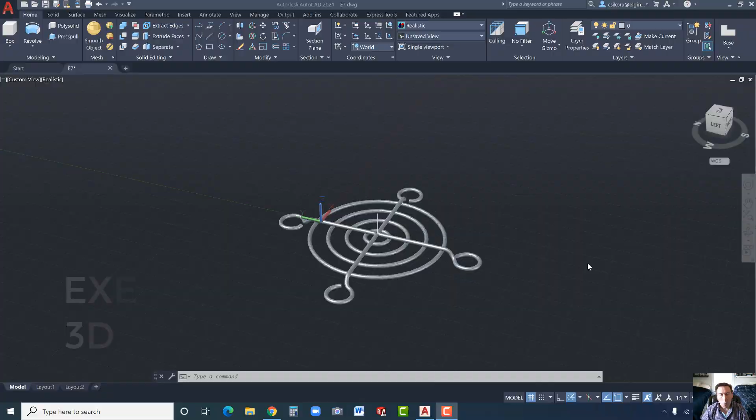This is a bit of an advanced lesson that we're looking at here. We're going to create this—this is actually one of those little grills that would go over a fan on the back of a computer. They don't use them as often on computers like they used to. Now you see them on medical equipment and things like that, but it's pretty generic.

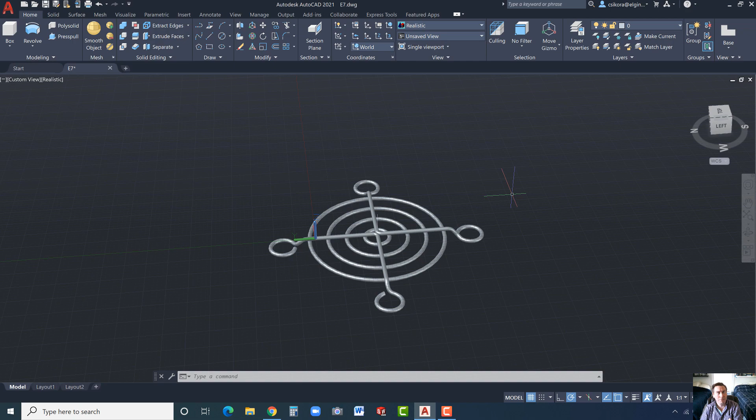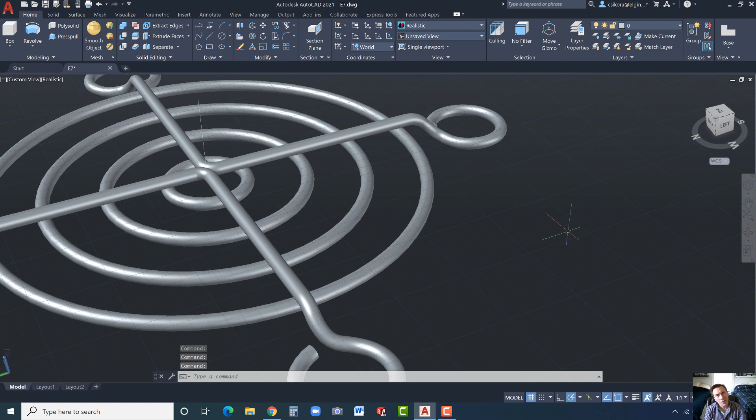So we're going to step through now. You might say, well, what's really advanced about this? For the most part, not much of it is. But if you look closely at the actual little foot pads, or I should say where the screws are going to hold it down or fasten it down, that's a three-dimensional bend that we're looking at. We want to see how that's done—that's the gist of it. But then I'm going to show you some other techniques that might be useful for you in efficient modeling.

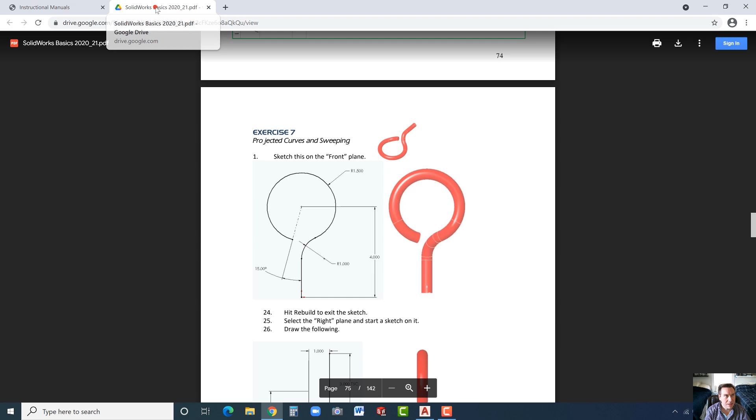So let's begin. First of all, the training guide I don't have written just yet—hopefully I should. If you want to go to vertanux1.com, and then go to the instructional manuals, you'll find this lesson in the Creo or the SolidWorks section. You won't find it in the Inventor yet, but you could look at either one of those. I should have an AutoCAD one up here someday, hopefully—no promises on that.

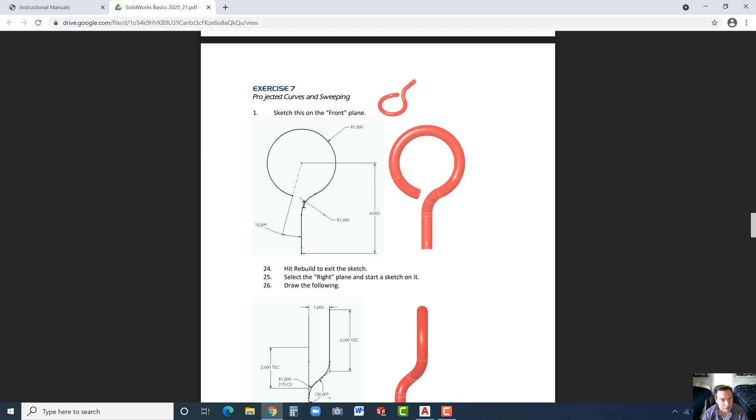But inside that, around page 75 or so, you'll actually see what we're trying to design here. You can see this is the bend part. We're going to draw this front view first, so it's about 4 inches in height, actually 5.5 if you account for the radius. We'll see how that's all put together, and there's a little opening there. Then we'll see the right side view, and we'll go ahead and construct that as well.

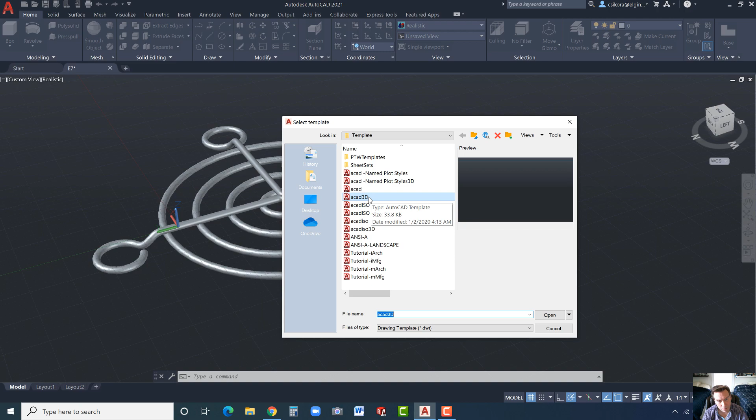So let's begin. Go to New, and we're going to use the AutoCAD 3D template. Those of you in other countries, or even in the US, you might want to use ISO, which is metric. My lessons are typically not metric—there's only a couple that are—but this one is not. So just so you know, you would go to the ISO 3D template for a metric version. But we're going to use the AutoCAD 3D, which is the Imperial version. Let's go ahead and click on that.

I like to start off, as always, with 2D wireframe. Then I go to Home and click on Top. Now we're going to start off by drawing a line. Go to the Line tool and turn your snap mode on so you can snap to the center there. Click, drag this up, type in 4, and hit Enter. Make sure it's vertical, then hit Escape. Let's click on Top here for a fit, and maybe scroll back a little so you can see the line.

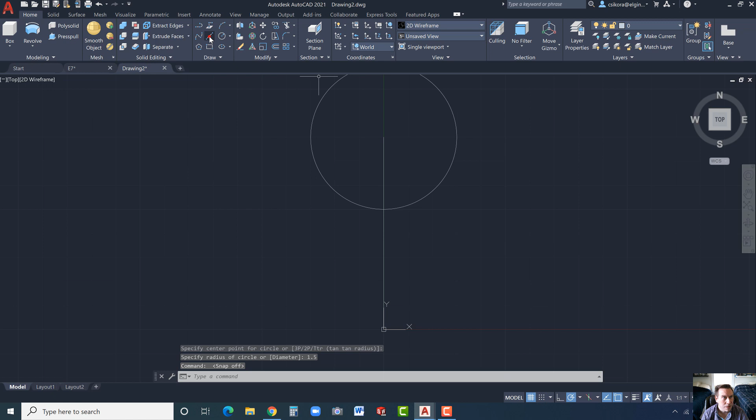Now, the next thing we're going to do, we know the radius is 1.5. So let's go center radius, snap to that top point, click and drag out, type 1.5, and hit Enter. At this point, I think we could turn off the snap to grid. Let's proceed to go to the line tool, and off of this point, click and drag down and cross over. We're going to make this about 2 inches, then hit Tab, and it's going to be 15 degrees. Then hit Escape.

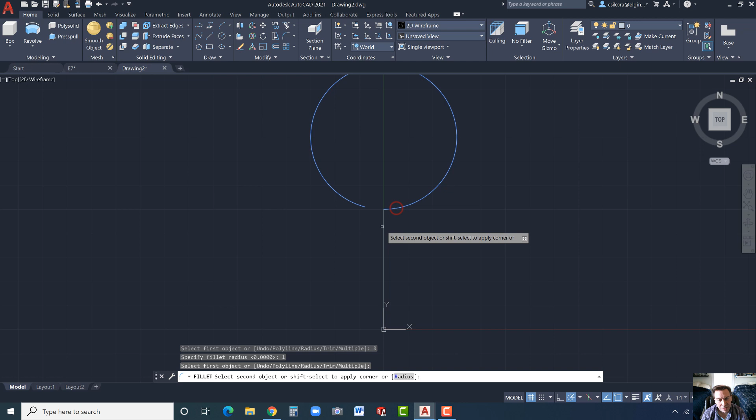Now we're going to trim that up—go ahead and trim through there. We could even trim this, and we could trim that, I suppose, or delete it, whatever you prefer. Now let's go to the Fillet tool, go to Radius, set it to 1 inch, hit Enter, and select this entity and this entity to get that radius in there. Now let's join it together, since we're going to go ahead and extrude this soon. So go to Join, click and drag a fence to surround it, hit Enter, and now it's one complete entity.

Now for the next one, let's go back to the Home button, and we want to make the right side view, which is a little bend in there. To do this, we're going to click on right over here—this is the rotate, and we want to rotate around the y-axis. Select that. Now rotate by moving your pointer to the right so that the z is to the right side, then click, and you'll see the grid will appear to the right.

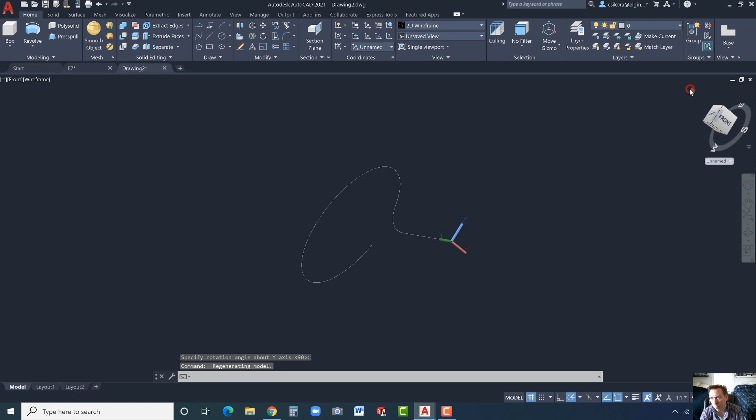There are other tricks, and I'm aware of that—I'm just showing you a way that other people who used Inventor or other CAD systems out there that are plane-based can understand. We're basically rotating our sketch plane in this case. Now let's go to the front. Actually, go back home, and rotate this around.

Okay, actually, I guess we could go to bottom. There we go, that's fine.

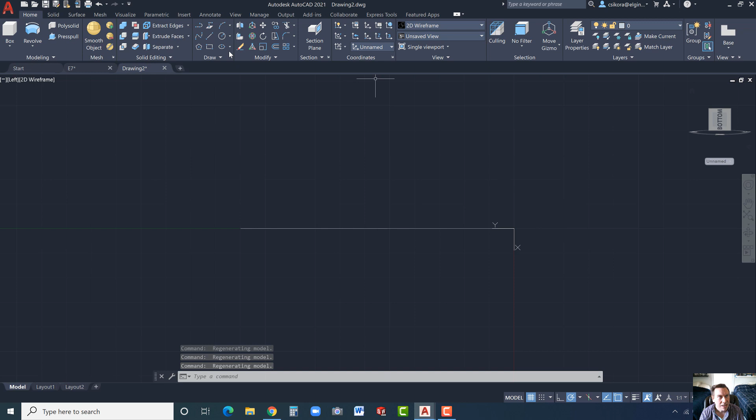Now we're going to go ahead and draw some more geometry. Click on the line tool and snap to this point, drag it to the left, and it should be 1.5, so we're following that edge that we see. Now drag this down, and we want this to be 1 inch.

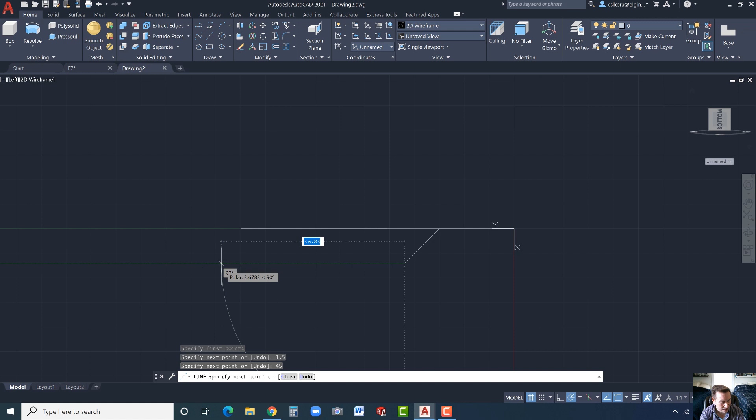Hit tab, and then we want this to be 45 degrees. Now drag this to the left, and we could have this extend beyond, so we could even put 4 inches in there if we want, and then hit escape, because that's not going to matter so much.

Now we could go to the fillet tool and go to radius, and we should be set for the 1 inch. You can just hit enter, and I'll select this and that, and then select this and that. Oops, hit escape, hit enter again, and then go back to radius. Oh, it was already set to that, that's fine. Enter, select this and that. There we go, so now we have the fillets on there.

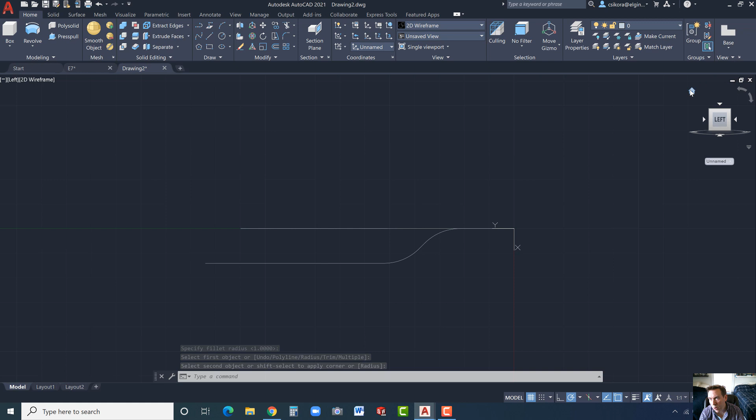If we go back home, we can now see, there it is, and we're going to go ahead and join those geometries as well. Click on modify, go to join, select this little segment right here at the fillet. There's a little tiny segment in there, this one here, and this one right here, and hit enter.

And I'm aware that my dimensions are a little bit different than the training guide. Feel free to use mine or the ones that are in the training guide, there's just some slight variations to them. But in this case, I wrote the guide, so I'm not overly concerned. I'm just going with what's fast versus having to toggle to and from the manual.

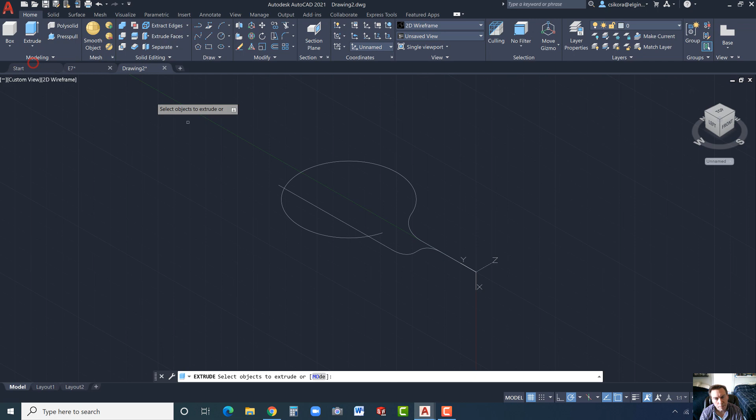Okay, and now we're going to go ahead and extrude these. So let's go to extrude, and we want to extrude this one here. Hit enter, and let's just extrude it about 3 inches in the downward direction. We didn't need it that deep.

But now let's go back, hit enter to extrude, select this one, hit enter, and drag this off. We're going to go 4 and hit enter.

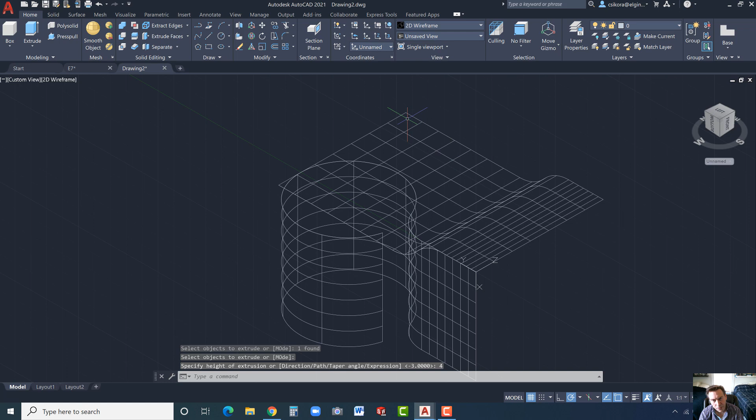Now let's shade this because it's going to be a little easier, I think, for you to see what we're doing. I'll go with shades of gray.

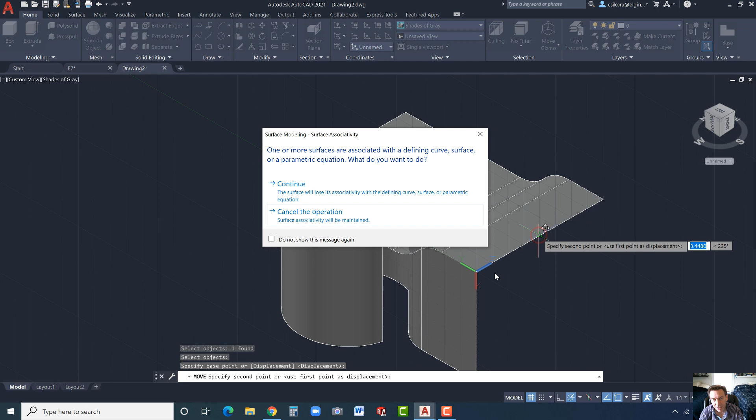Now what we need to do is get this sheet centered more. So let's go to move, click on move, find the midpoint. Actually click on the geometry first and then hit enter. Find the midpoint here, should give you a triangle, click, and it's okay. It says it's essentially going to blow away the curve connection. That's fine, we don't really need it anyhow in this one.

Now move this over to where the origin is. Click, and essentially that just centered it. Now you can go ahead and hit escape to make sure you don't have anything selected.

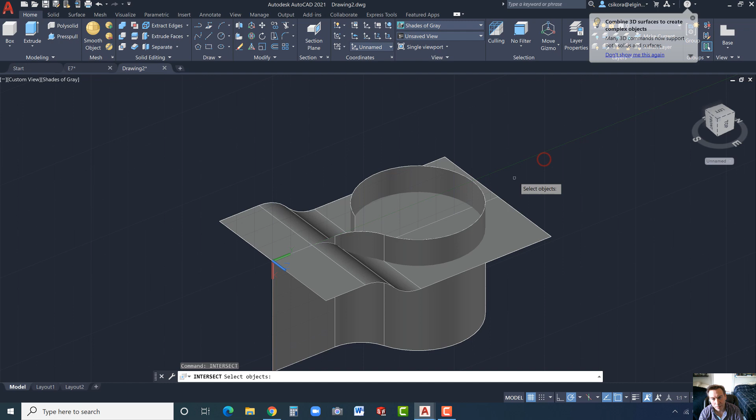At this point, we're going to go ahead and do an intersection. So type in INT, and you'll see intersect. Click on it, select this body, and then this one, and hit enter. And now we have a 3D curve.

Let's dissect this a bit. Let's create a new layer here. Go to new, and we're going to make a curves layer. Okay, hit enter, and you could close that.

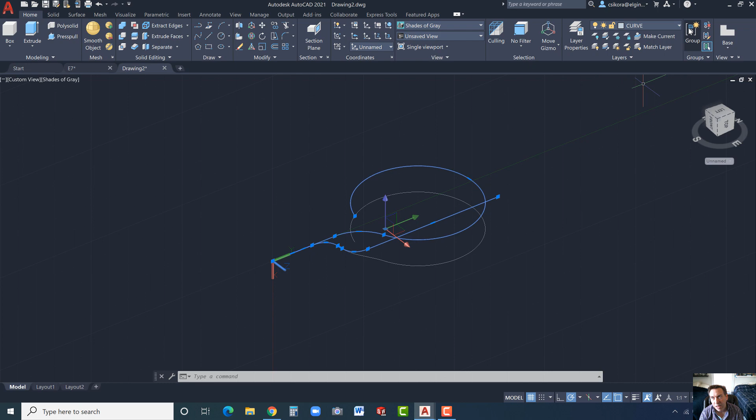Now let's select this straight one right here, and then this top one here. Go to the layers and just select curve. And now you could go to that same one and turn on the light, or turn off the light bulb, and it should hide those. And what it's left behind is our 3D guide curve that we've just created.

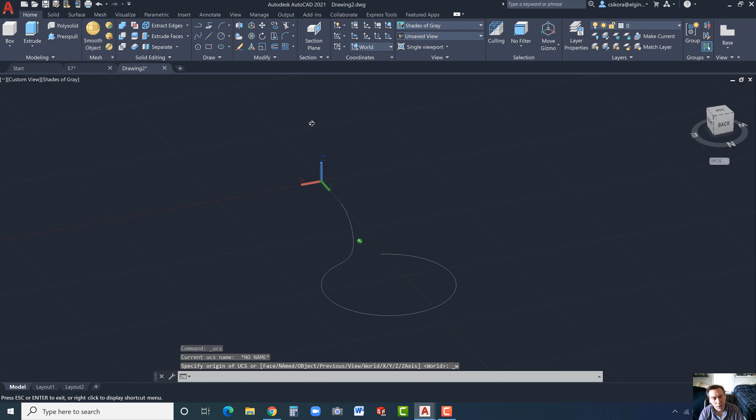Let's go ahead and go back to UCS World, it resets everything for us. I had to hit it twice, I'm not sure why, but that's all right. Okay, and as we rotate, we can now see we have a nice guide curve that we could follow through with.

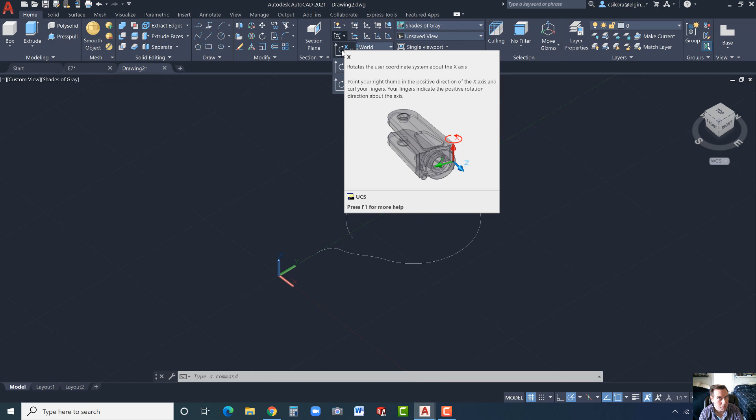Now what we're going to do, and again, we don't need to always do this. There's other ways, and if you have a way and you want to share it down below in the comments, go ahead, I know that there's probably a dozen ways to do this. I'm just doing this for the benefit of those coming from Inventor or some other CAD system that's plane-based.

We want to rotate about the X, and then make sure that the Y goes vertical. So see 90, I just dragged that up and it snaps. Click. And then now we could go to the circle tool and make sure we go with center diameter and snap to that point. This rotated us 90 degrees and we want it to be 0.5, and hit enter.

Now we could go to underneath extrude, find sweep.

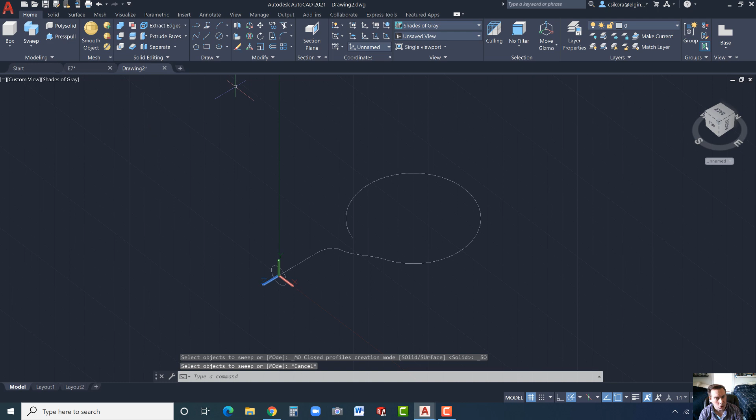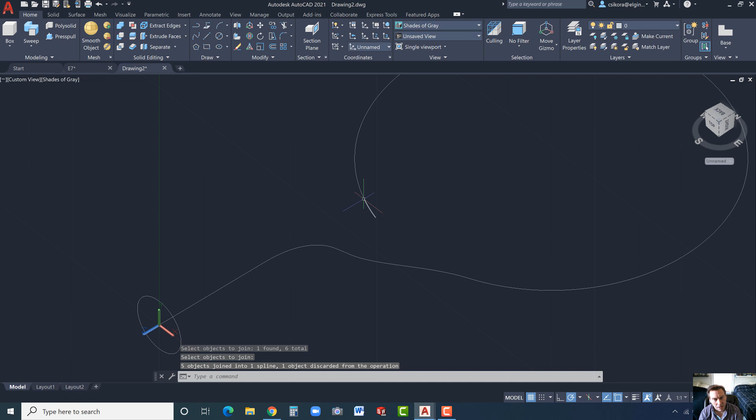Hit escape before we do that. We need to join this curve first. So under Modify, go to Join and select them on an individual basis so you don't accidentally select wrong ones. There's a few fragments here too. It might not have been a bad idea to just select the whole group. We just want to make sure. Yeah, see, I missed that one. Let's go back to Join, hit enter, click on this.

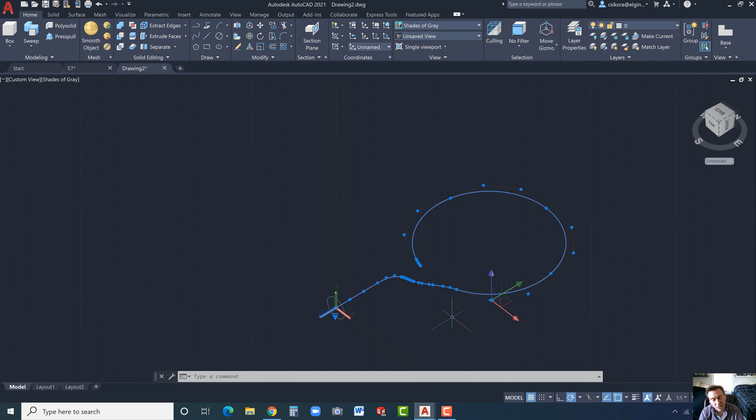There's little segments, so what we want to do is click and drag a fence to surround all of these, hit enter, then hit escape. That way we know it's all one piece. Now look at that, when we click on it we have control vertices to drag and adjust if we want, but don't do that here. You can take it after the lesson and send it to me, but let's finish this first.

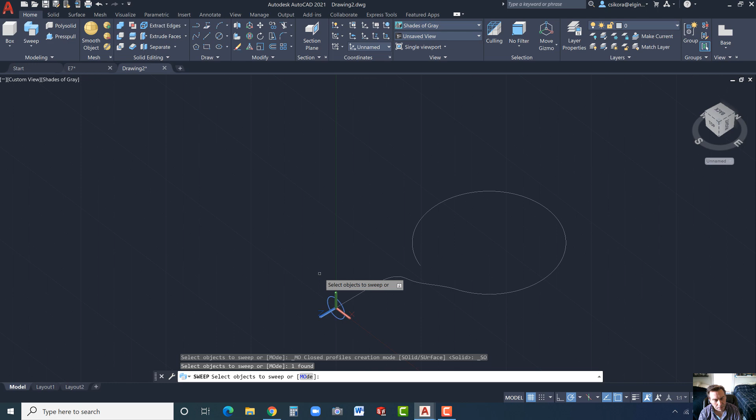Now we're going to go ahead and do our sweep. Click on Sweep. The first thing you select is the profile, which is the circle we drew. Hit enter, now select the path. We should see a preview—actually it's more than a preview, it's done. And there is our geometry.

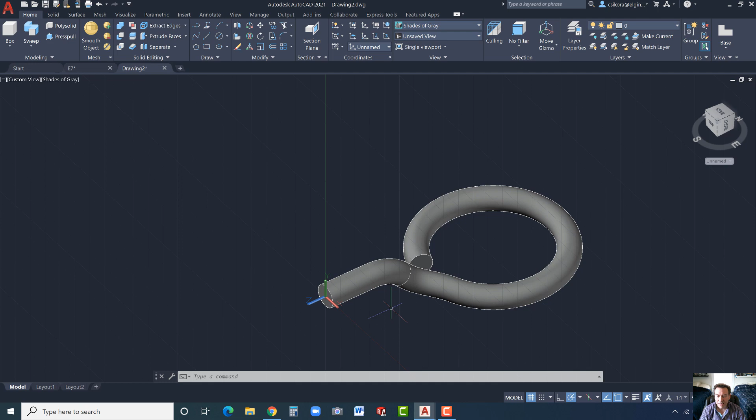Before you go on saying, well, what good is this—imagine you could use this for an exhaust system on a car that has to weave around wiring that goes around other entities in 3D. There are other tools in here, and manipulator handles that can maybe make it easier, but this is just one technique.

Now we're going to go ahead and do the rest of this body. Let's go over here to Press Pull and extend this out. Could I have done this earlier? Absolutely, all in one. But let's make this 7 inches.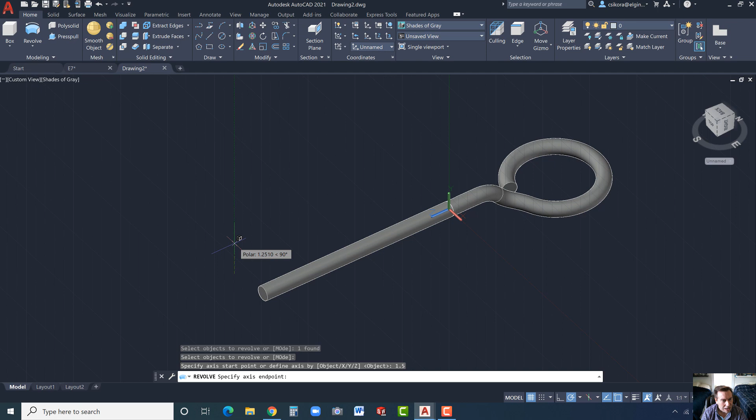Now we're going to go ahead and use Revolve. On the filter, go with edges and select this edge right here, hit enter. Now it's asking how far out we want this—let's make this 1.5 to the left, notice I'm snapping. Enter, and then just drag it straight up. This is basically our axis of revolution. It's going to give us the radius we saw earlier. Just make sure it's at 90 degrees there. The height doesn't matter. Click.

Now it's going the wrong direction, so hit reverse. We only want this to go 45 degrees, so type in 45. You're probably wondering why 45 degrees—we're going to double this up by mirroring it, and 45 and 45 gives you 90 degrees, so it's going to make this a 90-degree elbow for us. That's the thought process, at least.

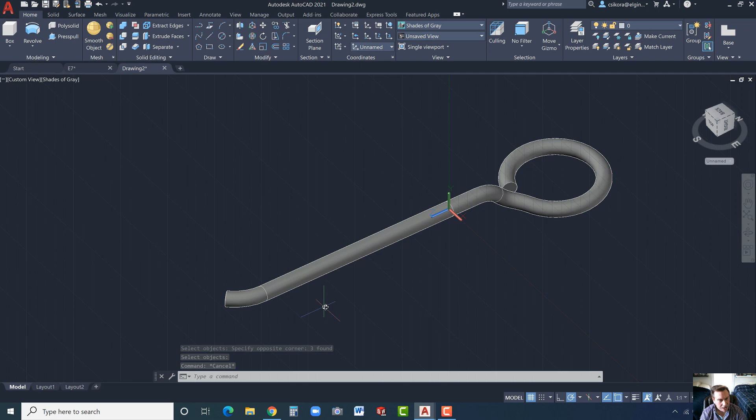Okay, let's merge all these, or unite them. Go to Solid Union, and we could probably just select all of them. Hit enter and escape, and click on it to make sure it all highlights. We look good. Rotate this around so you can see that end there.

Now again we're going to go to Mirror—we haven't used mirror yet in this case. Let's select the entity we want to mirror, hit enter, okay? And I like to use 3 points, especially on this, since this is kind of a weird little entity here. So pick up on the quadrants: 1, 2, 3. And delete source—no.

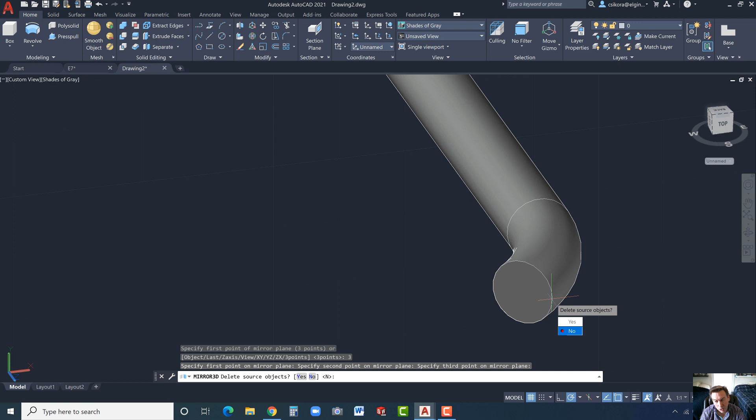There we go, so we've just moved this over to the other side—there's our 90-degree elbow. Let's unite them. Again, you could just click and drag across. If you go from right to left, it selects everything in the bounding box. If you go from left to right, everything has to be enveloped to be selected, so anything sticking out is not going to be part of the selection. That's why I went from right to left when making the bounding box. Now we have our elbow here.

Let's now flip this around, and we could rotate this around the Y-axis. You're going to see we're going to put some little circles for our revolve. Let's go over here, we want to go around the Y. Or sometimes I just like to reset so we don't get confused—go back to this little world there, make sure the Z is pointing up. Now we could go over here and rotate around the Y, and the Z should point to the right and make it snap. See, 90 degrees, click.

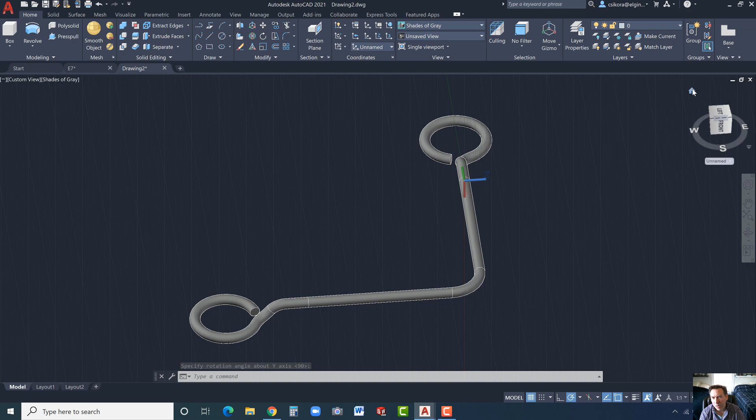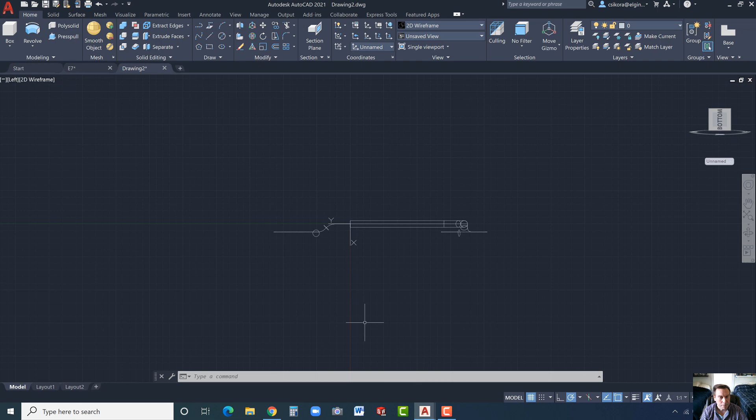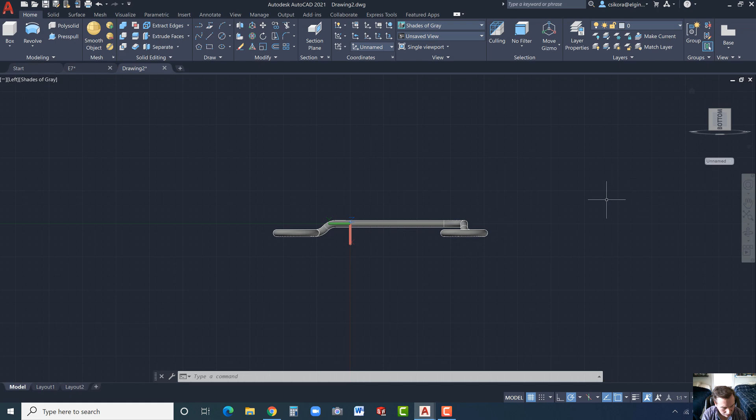Now let's go home and we could go to bottom. This is where I prefer to use wireframe again, which also shuts off the perspective. Note, you could always shut off perspective by typing 'perspective' here—0 is off, 1 is on. Perspective gives a vanishing point, just like in the real world the room gets smaller the further you are away. By disabling that, everything is straight no matter how deep you're looking. Actually, I think I'm going to switch to shades of gray. Let's see here—yeah, I think we should be able to do this. Let's flip this around.

I think we want it to look like that - that looks good. Basically we just want the top there. You could drag it around or go back home and reset it, and keep flipping these arrows until you get where you want, until you can see the top, then click on the top. If you want to rotate it 90 degrees, like standing upright, that's fine, or if you want to lay it down, that's fine too.

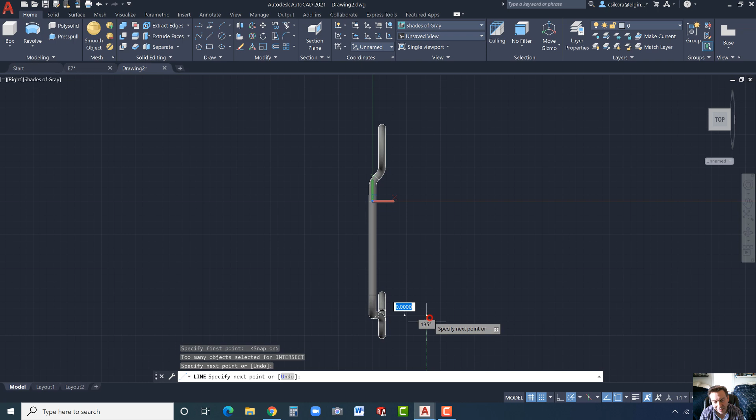Now we need to find the center of the model - that's not very hard. And that's the center of the model to be, not this one specifically. So go to line, and we want to snap - turn on the snaps here - and snap right in that center there. Click and drag it to the right or left, it doesn't matter, and the length doesn't really matter as long as you can see it. That's going to be our axis of revolution for the rings we're going to create.

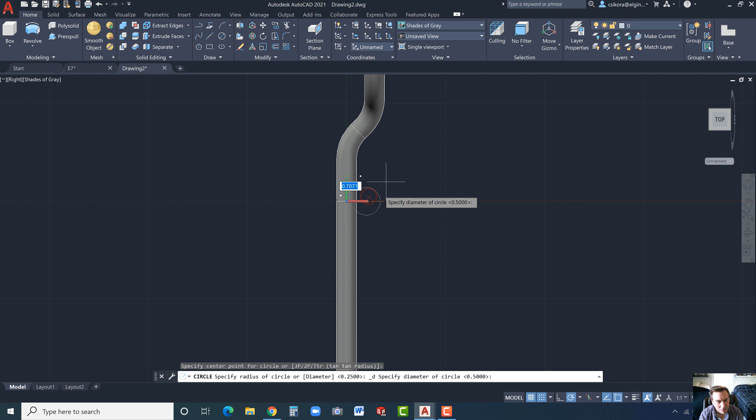Now we're going to go ahead and draw some circles. I'm going to draw the first one up here. That's pretty good right there, and we'll make it 0.5. Okay, it's snapped right there - you can see I'm still on snap to grid. You could turn off snap to grid now.

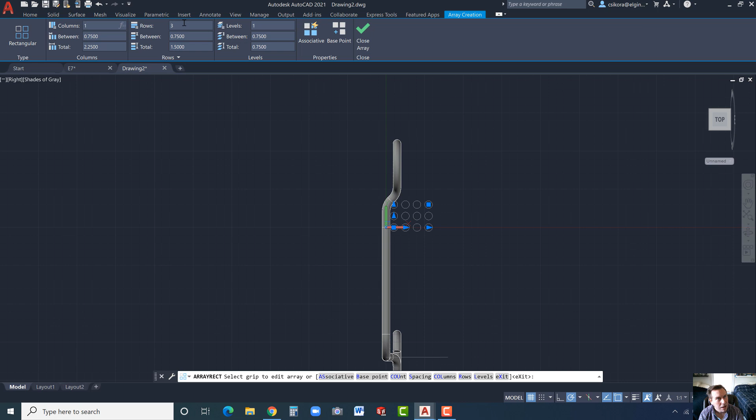With that, we're going to click on that geometry and go to rectangular array. With the rectangular array, you can see here 4 columns, which we actually just want 1. Then over here, rows, we actually want 4. And then for the spacing between, let's go with -2.

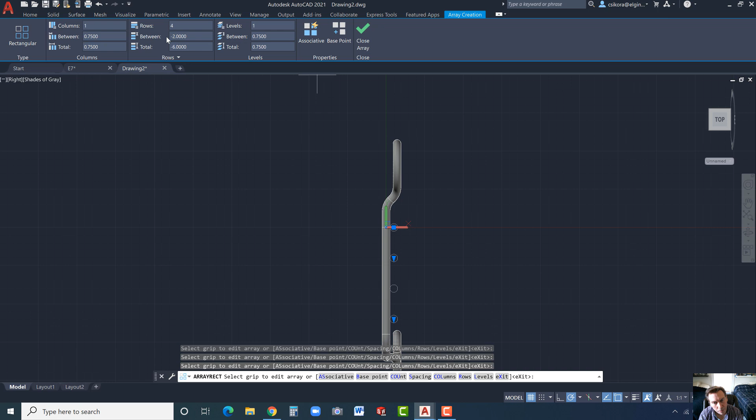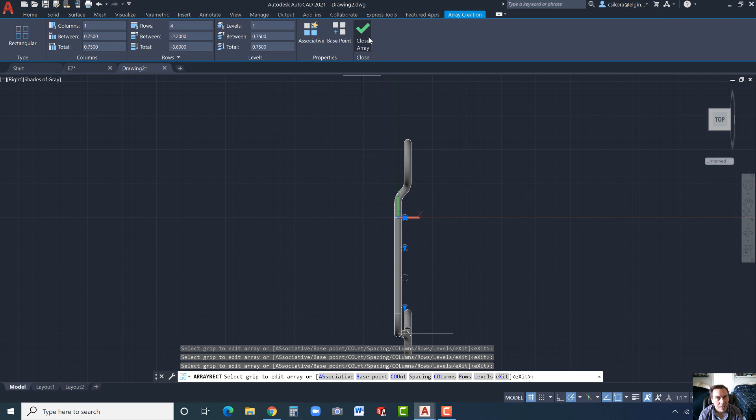All right, we should see them right there. We could actually make that 2.2, or something else, to spread them out a bit more - oh, forgot, let me type in negative again. -2.2. All right, looks pretty good. Hit close array, and now we're ready to revolve.

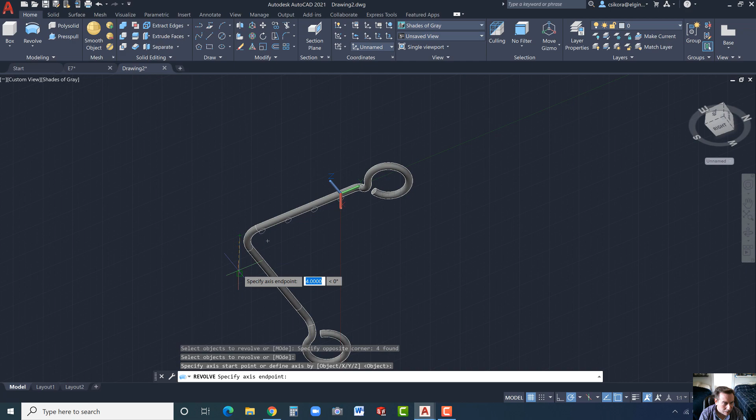So let's rotate this a bit, and we could go to revolve. From left to right, make sure you envelop those 4 circles, or you could select them individually. Hit enter, and this is going to be what we pattern around - not pattern, but revolve.

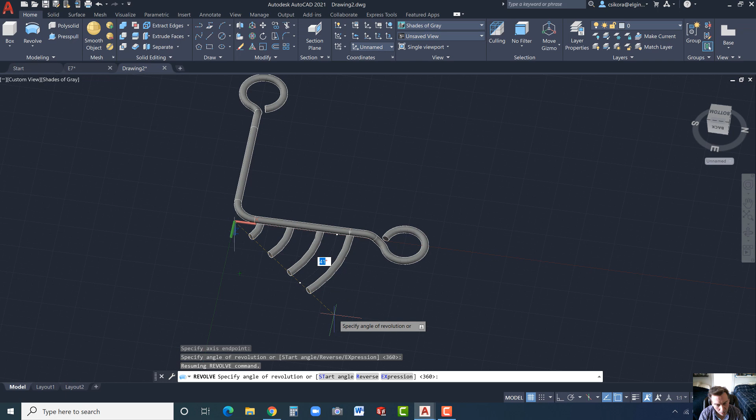Okay, now here's the thing - we're going to have this go, and I guess we could do the 45 first. Let's do the 135. Oh, and we're going to reverse it. 135, okay.

All right, now we're going to do those same ones again and add 45 to it. So for the filter, if you just turn on edge temporarily - remember, sometimes you have to turn off. This has like a little AI in it, I think, that turns it off automatically sometimes, which is really nice. So anyhow, we're going to select these.

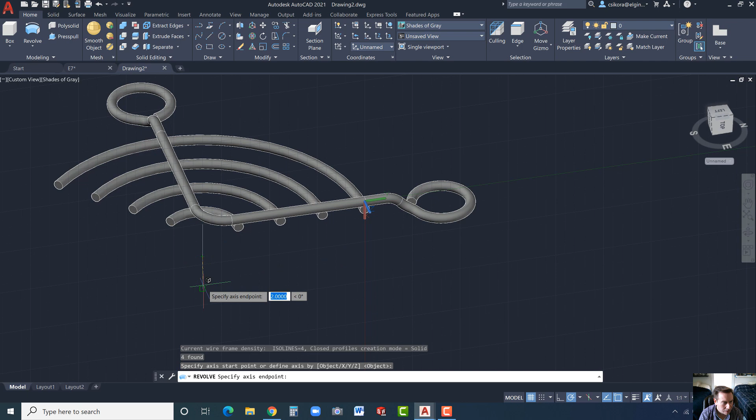Hit enter, and let's go ahead and select that point, this one, and this is just going to go 45. So 135 and 45 equals 180 degrees.

Let's merge everything, so go to Union, and I'm just going to go from left to right, or right to left. Hit enter - you can see everything is connected now, it's all one.

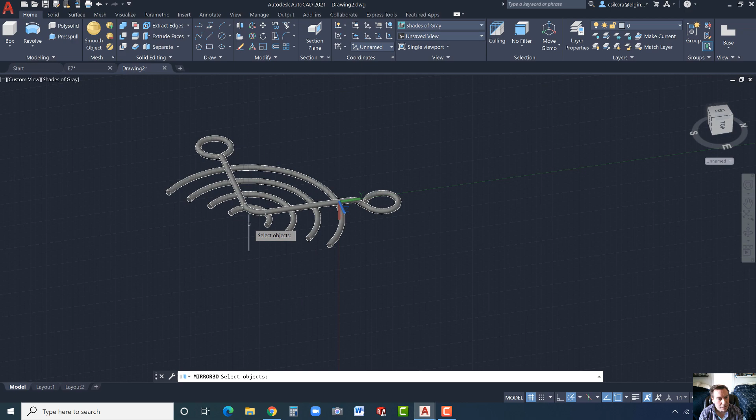And now we could go to Mirror. For Mirror, we just select the entity, hit enter, and now we could use some points here. We could select that point there, this quadrant here, and that. Hit no - all right, and so basically we made a mirror plane.

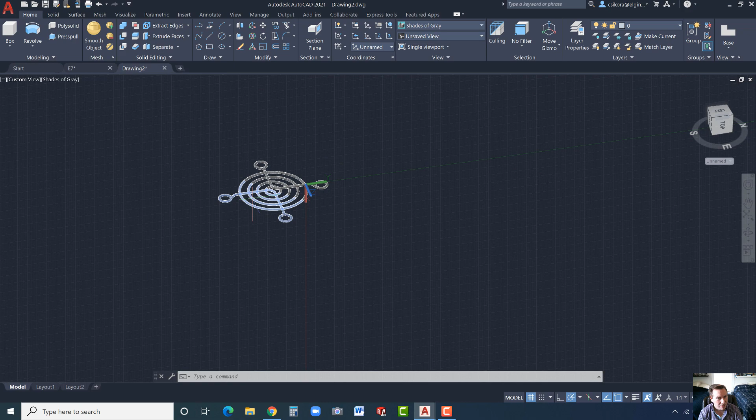And there it is. Now you might notice this one's a little different than the last one I made - let's merge it. In terms of, I made more of an opening gap there - that's more realistic. I had actually originally made the inside radius 1 inch, and I just upped it to 1.5 inches, so that's when we did that revolve in there.

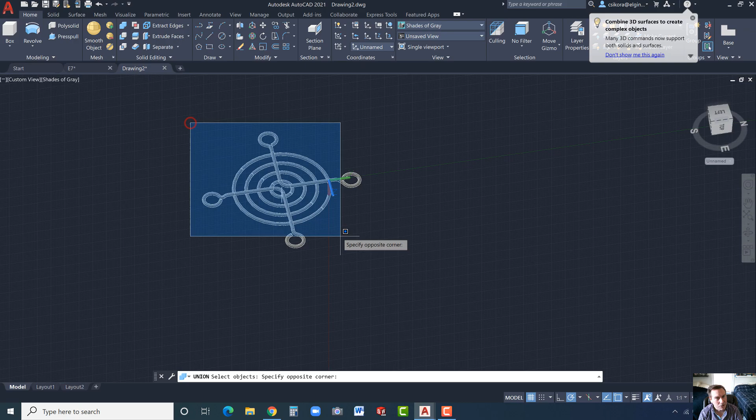Okay, let's unite all this - click and drag a fence to surround it, hit enter. And you can now go make it look a little bit better, under realistic. And there you have it.

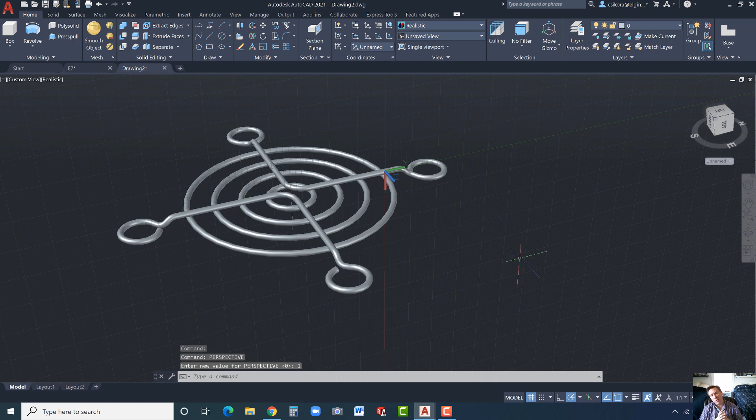That's a pretty advanced lesson. Just to show you here too, if you type in perspective, there it is - and see it's set to 0 right now. Turn it to 1 and watch what happens - it gives that vanishing point, looks a little bit more realistic, looks nicer for renderings, things like that.

Okay, that concludes this exercise. I hope you enjoyed it. See you with exercise 8.